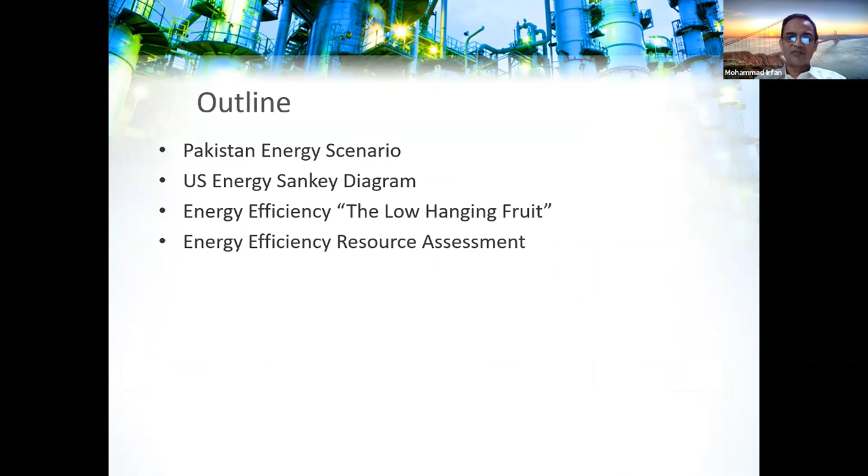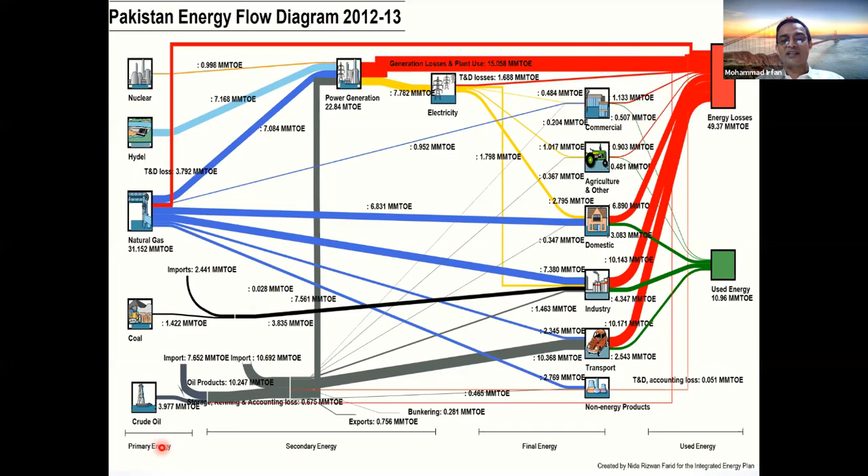Now the concept says that whatever you save, you give it back as a resource. So now energy efficiency, along with your nuclear, hydel, natural gas, coal, and crude oil, you have another resource in Pakistan, which is called energy efficiency. So how do we calculate this resource, right?

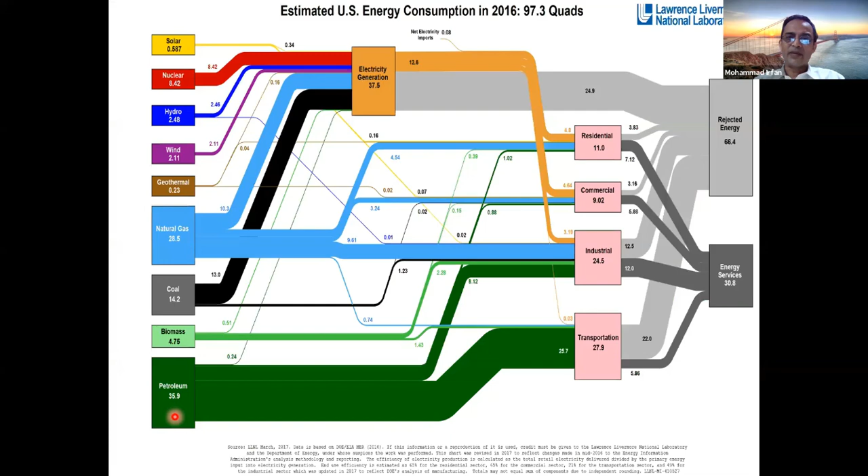Similarly for USA, losses are there, but if you recover, then it becomes a resource, right? So can we reduce wasted energy, right? And we say that waste is not waste until it is wasted. So among all the other resources, if you want to generate electricity, energy efficiency is the cheapest.

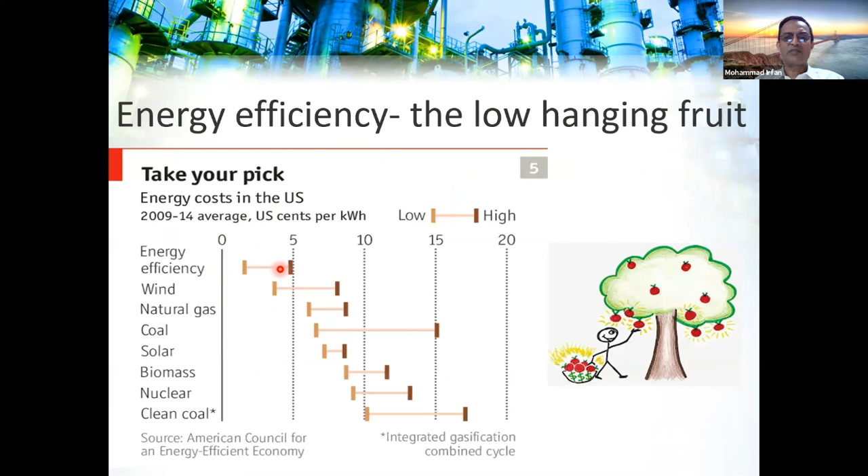It will cost something, right? It will have some cost, for example 0 to 5 cents per kilowatt hour. Others are all more expensive. So it's a low-hanging fruit. Even if you look at the levelized cost of electricity, energy efficiency is the lowest, right?

Solar, yes, it's coming down. Solar every year, every month, it is reducing, right? But the others, nuclear, gas cycle, etc., are not reducing as much. So if you're installing a power plant, we'll say that energy efficiency is the cheapest option.

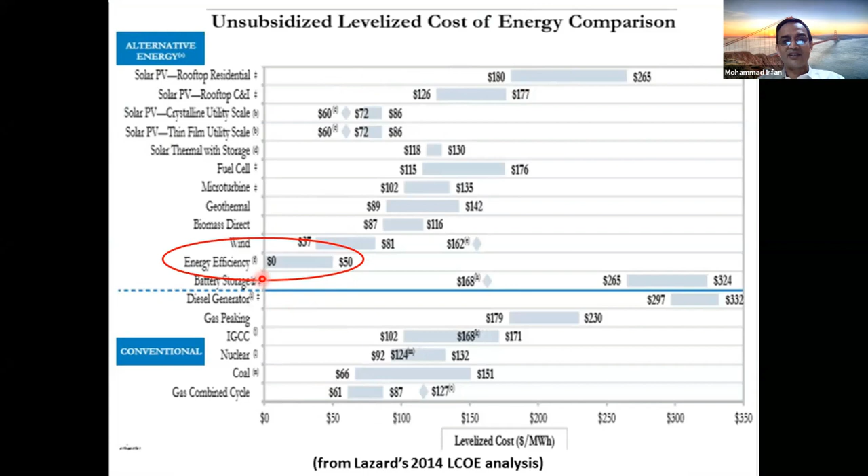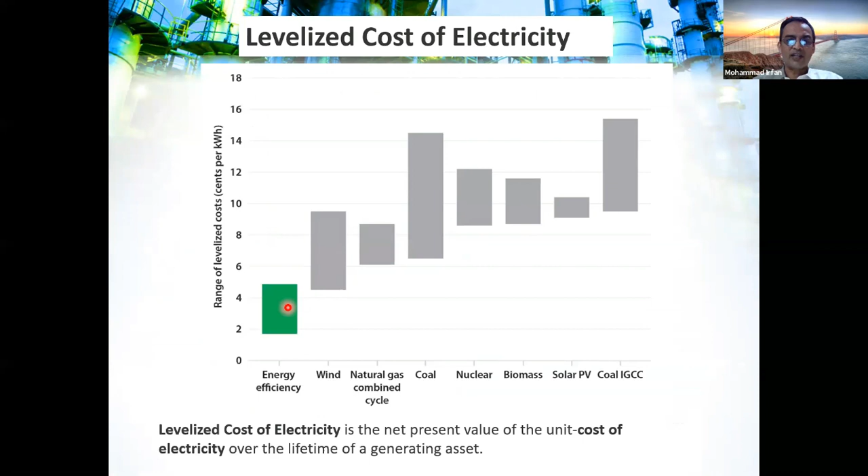And we say that a megawatt saved is a megawatt generated. Same thing about levelized cost of electricity, same graph expressed in a different manner. This is cents per kilowatt hour, again 0 to 5 cents per kilowatt hour.

So we also have this resource in Pakistan, but how to tap it, that is the topic of today's lecture. Now I think you're very clear with the concept that energy efficiency measures, although applied on the demand side, can be counted towards the supply side. So energy efficiency is a resource, right?

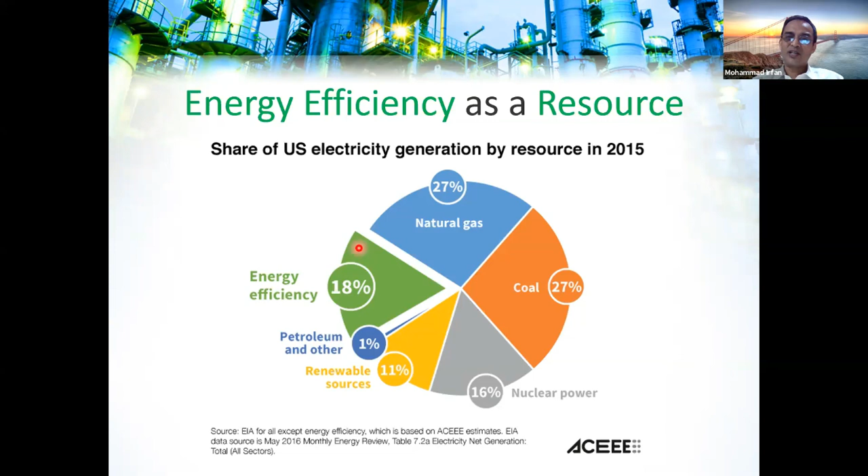And world over, such energy efficiency resource assessment reports are being generated. So for the Oregon state, one of the 50 states of America, they conduct a full study of what amount of resources are available.

Just for example, in KP, you want to survey for oil, right? How much oil is available underneath the ground. You want to survey for natural gas. Similarly, there has to be a survey conducted for how much energy efficiency measures are available. It's available right there where you are sitting, underneath your building. There's, I'll say, a well of oil there.

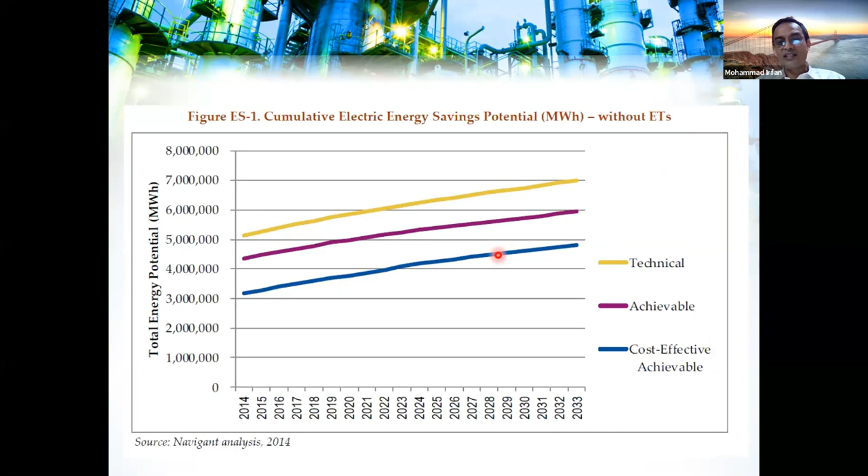So everything that is mathematically possible, sometimes it's not physically possible, but still what all is really possible in your world - there's a huge resource lying there and we have to tap it.

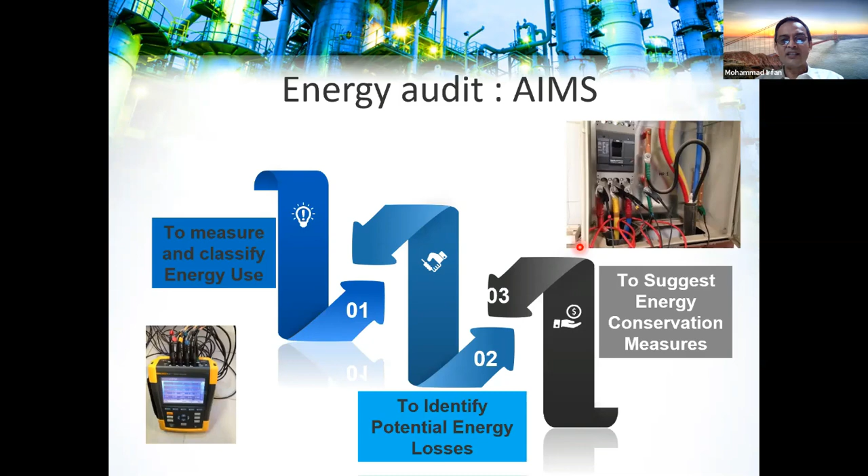So the resource assessment starts with measurement, and mostly these resource assessments will start from energy audits. Once you know how much is there, you can classify how much can be saved. So by these resource assessments, it's benefit to the country - a megawatt saved is a megawatt generated. The total carbon footprint will reduce, and it makes your industries more competitive globally.

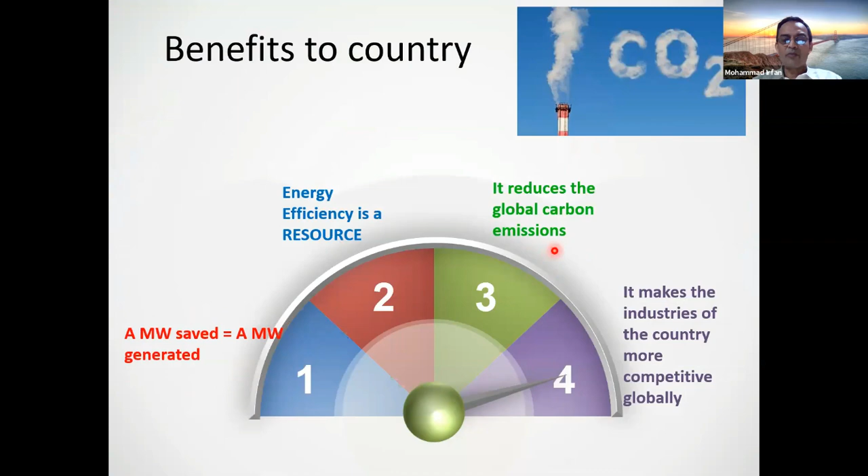So today we start with this message that Pakistan should start its journey on energy efficiency resource assessment. It might be taking the first step, but you will never finish if you don't start. So with this very short introduction, without going into technical detail, because that's followed in the subsequent lectures, you are most welcome to ask general questions. Then we'll go into the detailed resource assessment of the marble sector and textile sector.

So, general questions about resource assessment, you are most welcome.

The energy mix of Pakistan shows that around 37.46% of the energy is consumed by the industrial sector. It means that a large portion, a large chunk of energy, is being consumed by this sector.

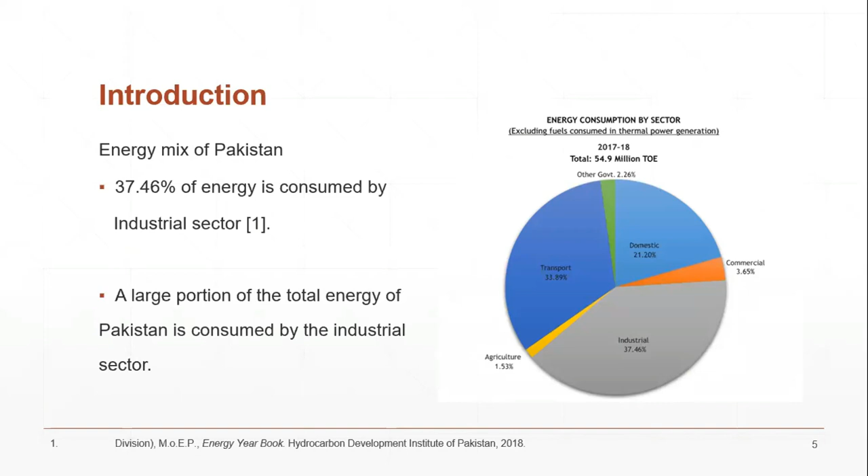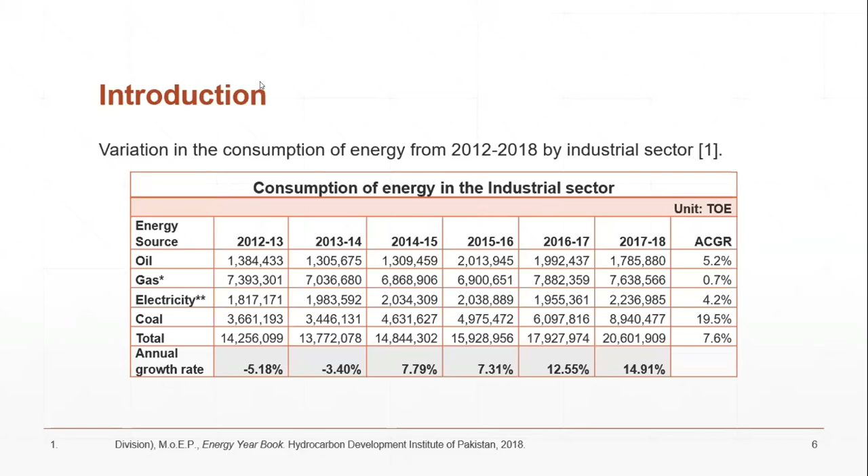So we will continue with the presentation. Let's talk about the literature review. Can you please mute your microphone?

So let us see the energy efficiency resource assessment study of the Oregon State, which was conducted by the ACEEE. Oregon State's different sectors were studied for their energy usage, to see where energy is being used efficiently and where the energy use is inefficient. As a result of that study, some energy conservation measures were suggested.

These measures were suggested in the agriculture sector, the food sector, wood and production, etc. And for each sector, the energy efficiency potential was quantified for the next 10 years. As a result of that, a potential was calculated: 306 megawatts of electricity can be saved by implementing the energy conservation measures.

So this 306 megawatts of energy saved is basically an energy resource which we can utilize elsewhere. So we will carry this concept forward.

Now we study the importance of energy efficiency in the marble sector. First of all, a study was conducted by the State Bank of Pakistan on the marble sector, which reported that the exports from July to September 2012 were US dollars 12.5 millions, and these exports increased quite a lot from July to September 2014. It means that the marble industrial sector has a huge growth potential.

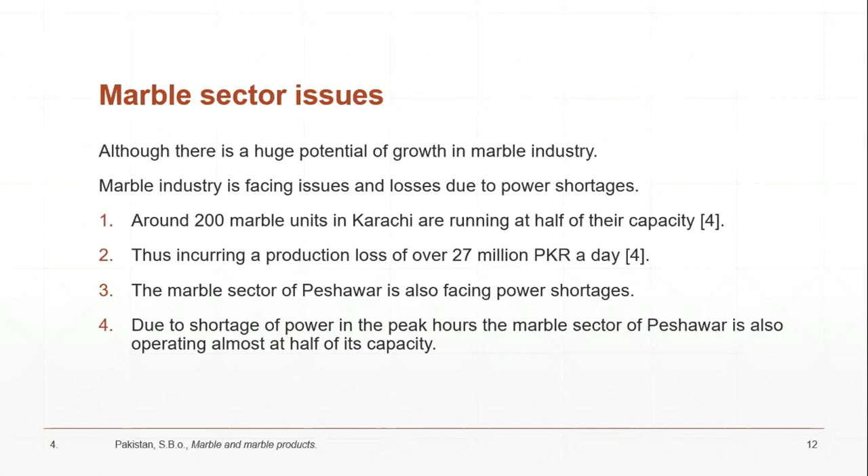So the major two problems quantified here are: number one, a very inefficient use of energy is exercised in the marble industrial sector of Peshawar. Number two, there is a lack of energy efficiency study and measures in the marble industrial sector.

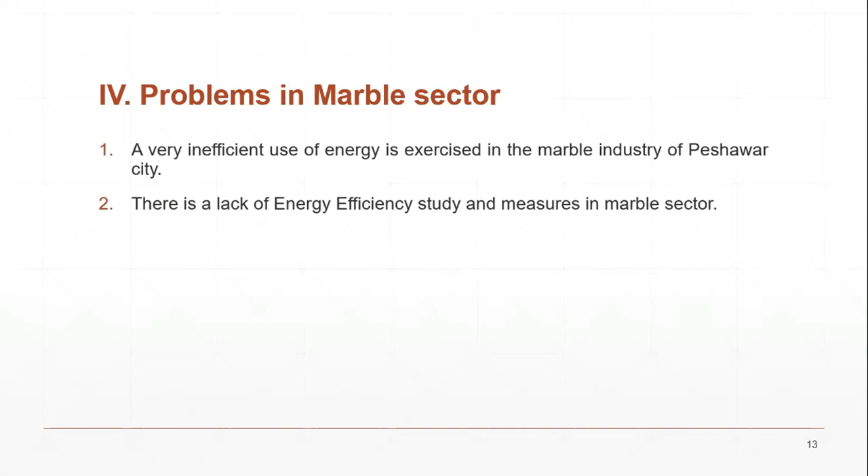So we conducted a study for the marble industrial sector of Peshawar, which basically includes 315 marble units.

The second step was a detailed energy audit of ASHRAE level 1 and ASHRAE level 2. Then some samples were taken from the entire industrial sector and an energy audit of those samples was conducted.

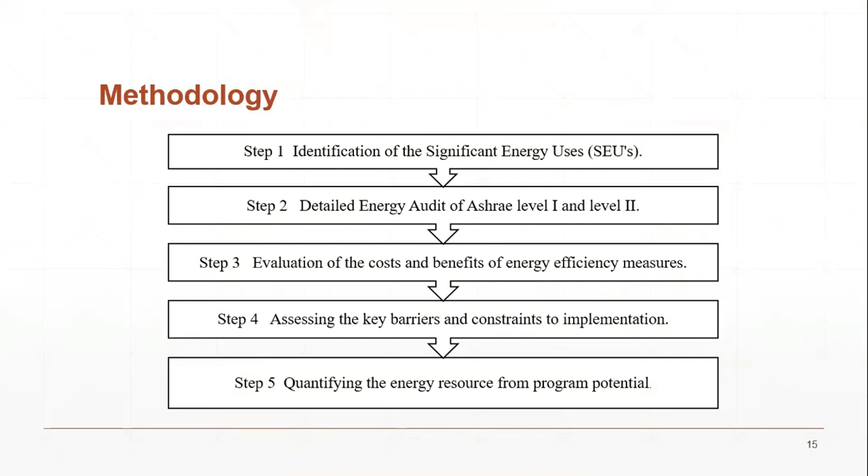The third step was to evaluate the cost and benefit of energy efficiency measures. As a result of the detailed energy audit, some energy conservation measures were suggested, and each energy conservation measure's cost and benefit analysis was done in terms of economic parameters.

In the fourth step... can you hear me, sir?

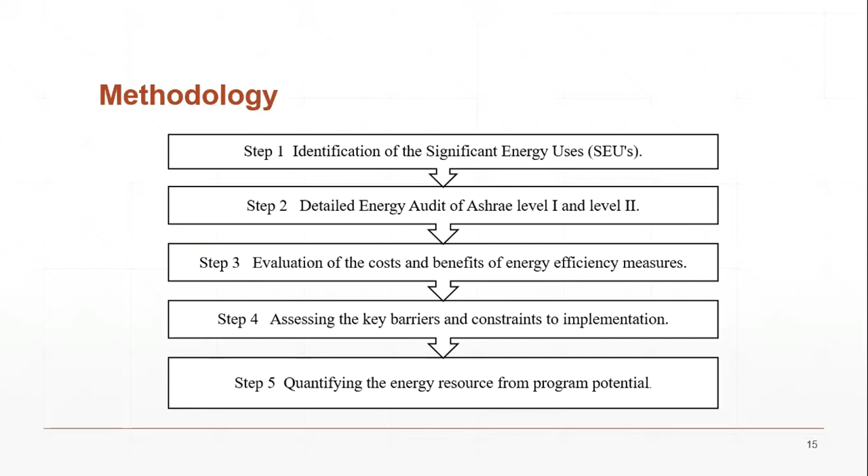We will move towards the energy audits. We conducted the energy audits of sample industries. A few energy audits are presented here - the energy audit of marble industry number 1.

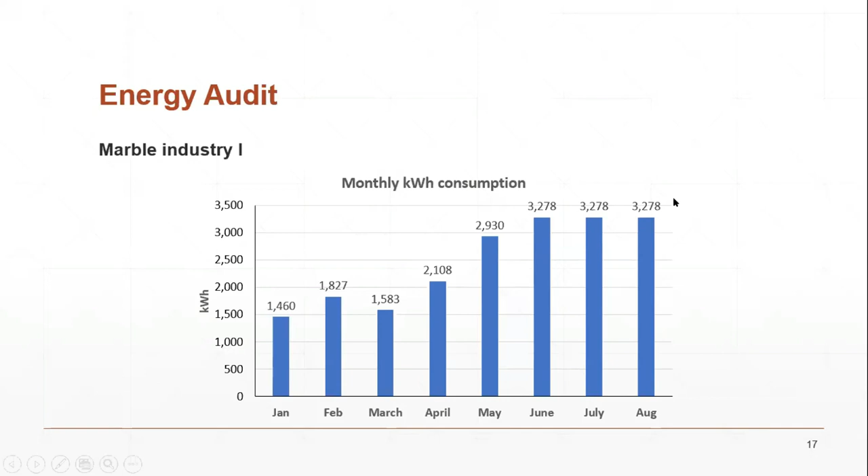Then we studied the electricity bills of the industry. After studying the bills, we identified that the industry is being charged for a low power factor penalty, because the industry is being operated below the power factor of 0.85. The industry wasn't even aware that they were being charged this penalty. So the first step was identifying the low power factor penalty from the electricity bills.

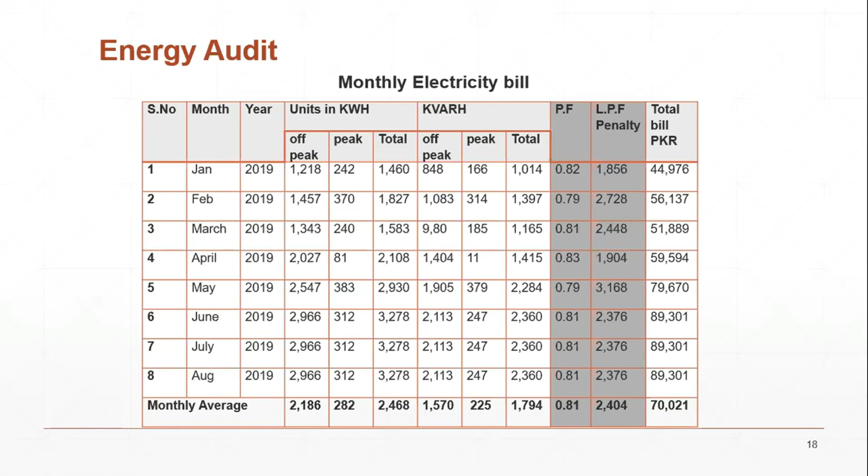The current practice in the industry was that the average power factor of the facility was 0.81. The impact of this practice was that the facility was being charged a penalty of 28,848 Pakistani rupees per year for this low power factor.

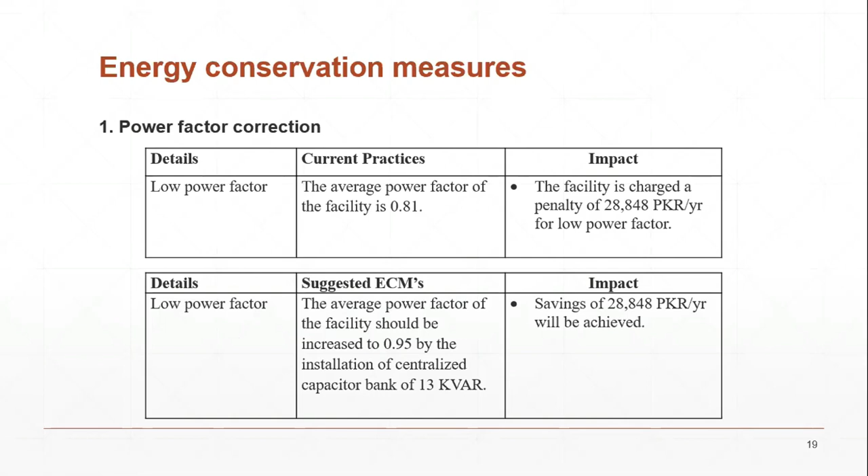So we recommended that the power factor of the industry should be increased to 0.95 by the installation of centralized capacitor banks, calculated to be 13 kVAR. The impact of this energy conservation measure would be that the industry will save 28,848 PKR per year by implementing this measure in the energy bills.

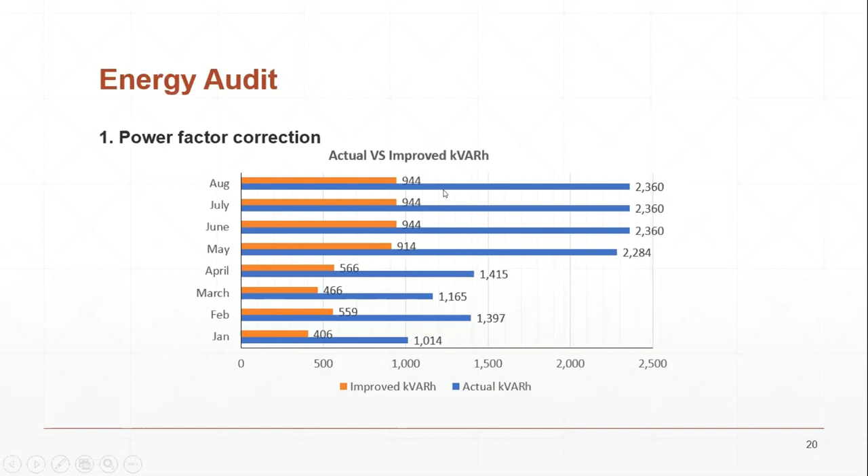So for this energy conservation measure, we calculated the economic terms. If we increase the power factor, we would save a total of 28,848 rupees. This investment will be of 25,000 rupees, and it will pay back in 10 months. The benefit to cost ratio for this investment comes out to be 9, and the internal rate of return was calculated to be 82%.

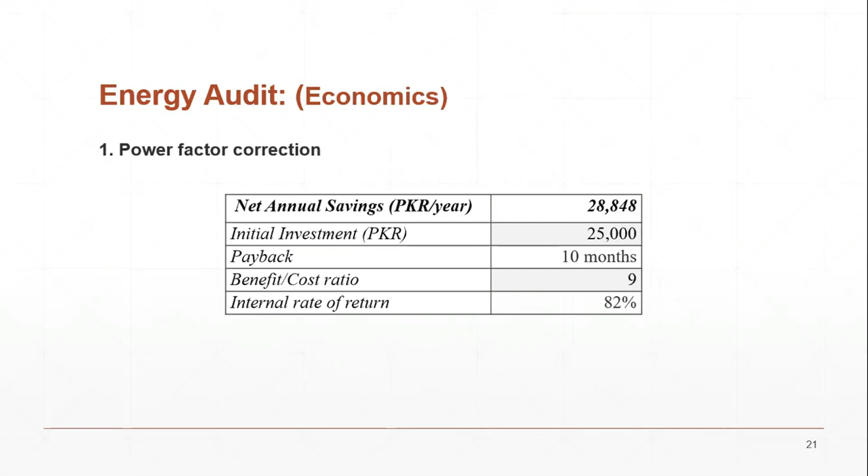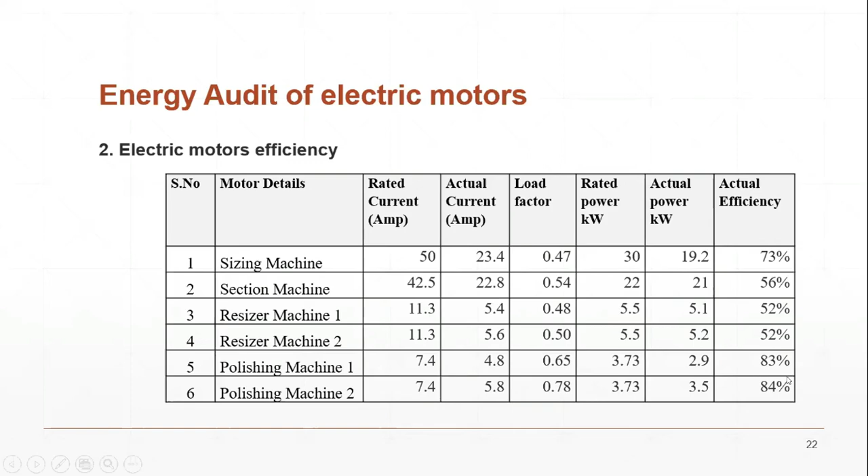The current practice in the industry was that it was operated by motors of 52 to 84% efficiency. As a result of these low efficient motors, the energy consumption of the industry was increased.

We recommended that some of the motors which are operating below 70% efficiency should be replaced with 95% premium class efficient motors. This energy conservation measure would impact a saving of 12,156 kilowatt hours per year.

Hello, sorry, can I ask a question, please, about the economics? My name is Muhammad Ali. Can you please tell me how did you calculate the efficiency of motors?

Can you hear me? I think Engineer Zaim will respond. If you can go to the previous slide, Engineer Zaim. So they are asking how did you calculate the electrical motor efficiency. You can tell about the power quality analyzer, etc. You can share the process with them. Over.

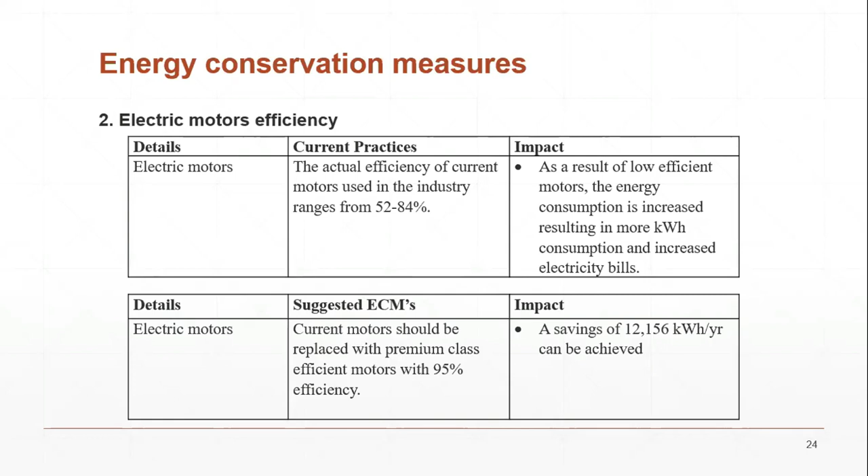The different economic parameters calculated for this energy conservation measure are: if we invest in German Siemens motors, replacing the current motors with German Siemens, the initial investment will be around 1.5 million rupees. It will pay back in 9.2 years. The benefit to cost ratio will be 0.85, and the internal rate of return is around 1%.

But if we invest in Chinese Siemens, the initial investment is around half compared to the German Siemens. It will pay back itself in 4.6 years, and the benefit to cost ratio is 1.7. The internal rate of return comes out to be 17%. Although 4.6 years is a long payback period, the life of motors generally ranges around 10 years, so we can still invest in this energy conservation measure.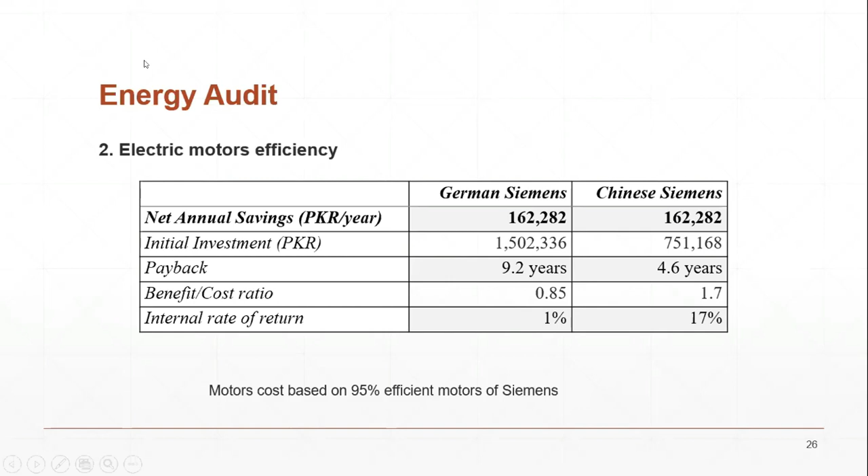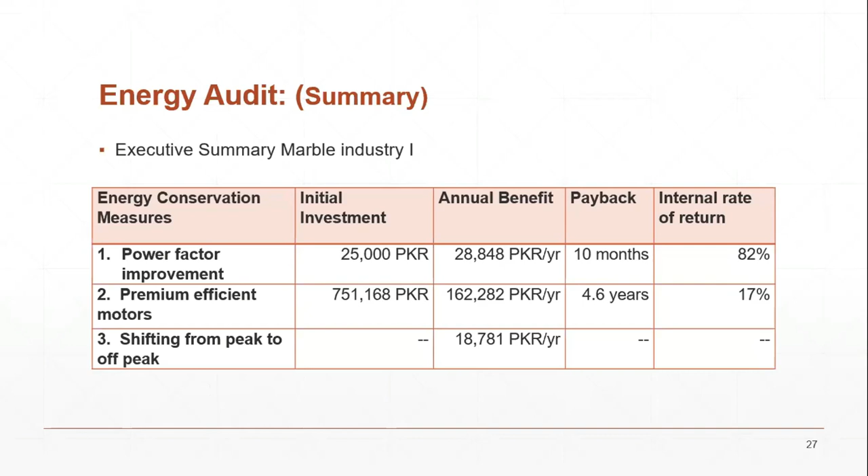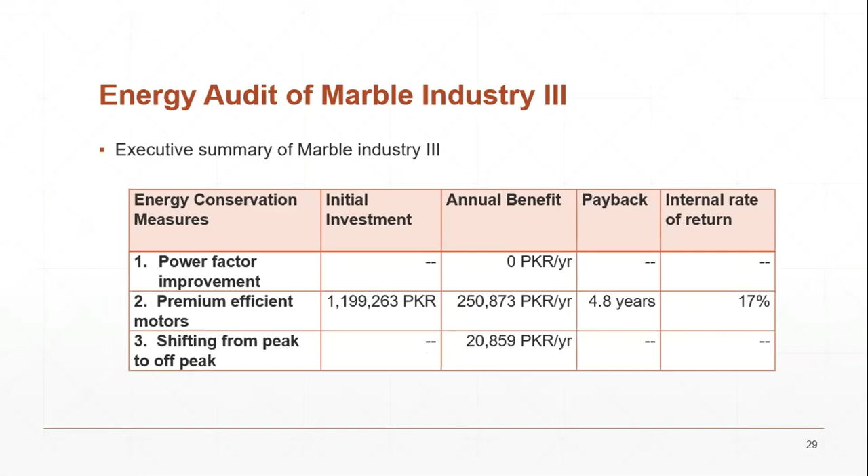Now we will study the energy efficiency resource assessment for this sector. The program potential identified for energy savings in the marble sector of Peshawar consists of: number one, power factor correction; number two, use of premium efficient motors; number three, shifting from peak to off-peak hours.

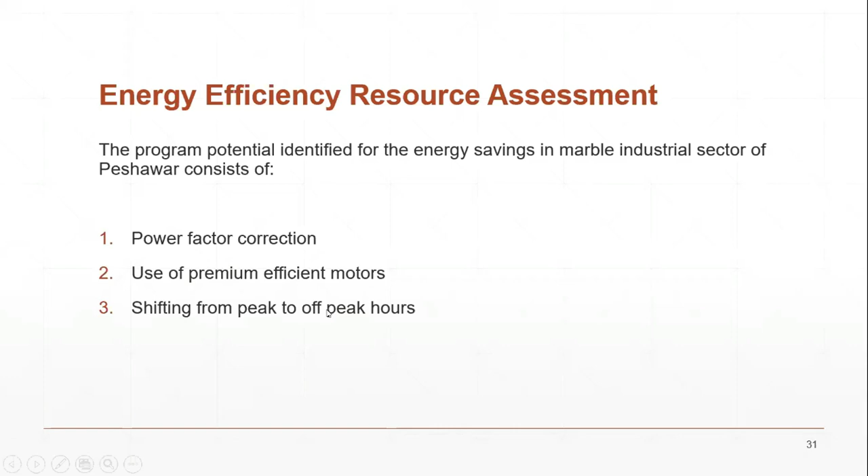Average savings of the industry are calculated on the base of 18 samples. We have just listed 3 industries, but it is actually calculated for 18 industries. The savings in kilowatt hour per month for a single industry will be 1346 kilowatt hours per month, around 16,000 kilowatt hours per year, and the industry can save up to 215,000 PKR per year.

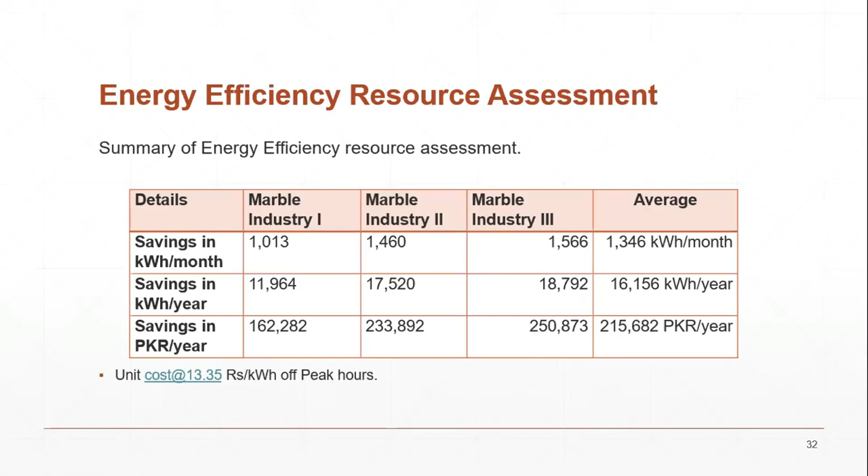If we extrapolate these results for 315 marble units of Peshawar, the estimated consumption of these 315 marble units per year is around 12 million kilowatt hours. And if we implement the different energy efficiency measures presented before in my slides, we can save around 5 million kilowatt hours of electricity per year, which is a huge figure.

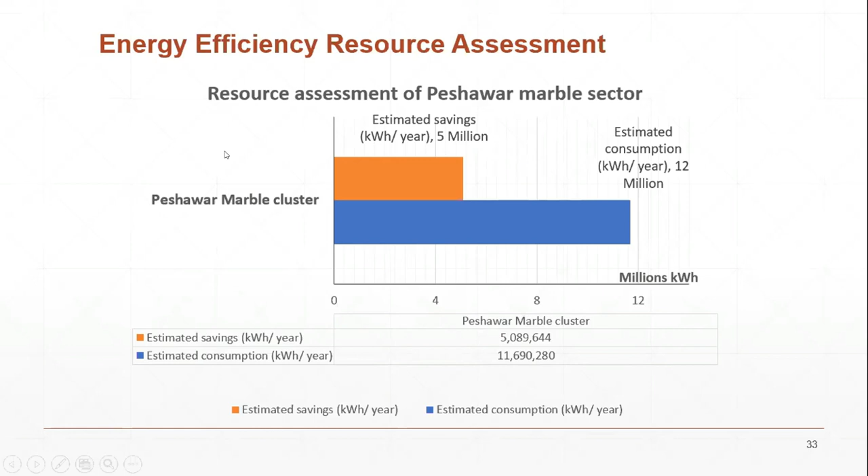If we compare these ECMs in terms of rupees, the estimated bills the whole industrial cluster of 315 units pays to PESCO, the Peshawar Electric Supply Company, is around 156 million rupees. If we replace the low efficient motors with highly efficient motors, we can save up to 67 million rupees for this industrial sector.

If we correct the power factor, we can save around 6.74 million Pakistani rupees per year. And if we shift the working hours from peak to off-peak, we would save an estimated 7.27 million Pakistani rupees per year.

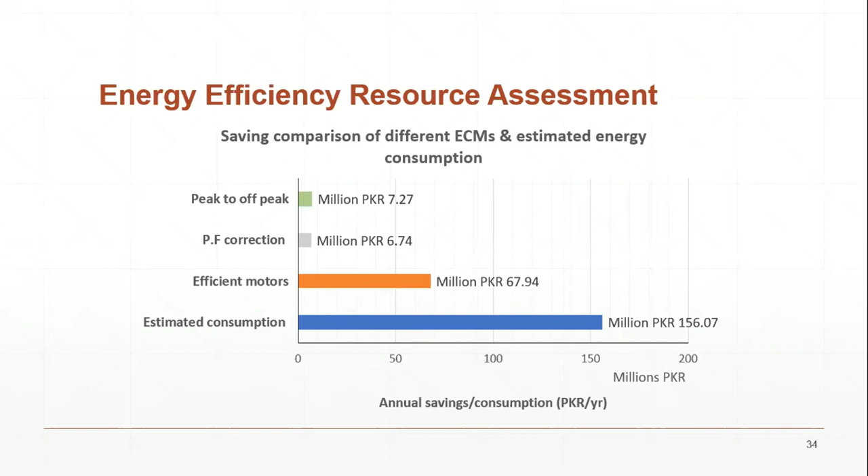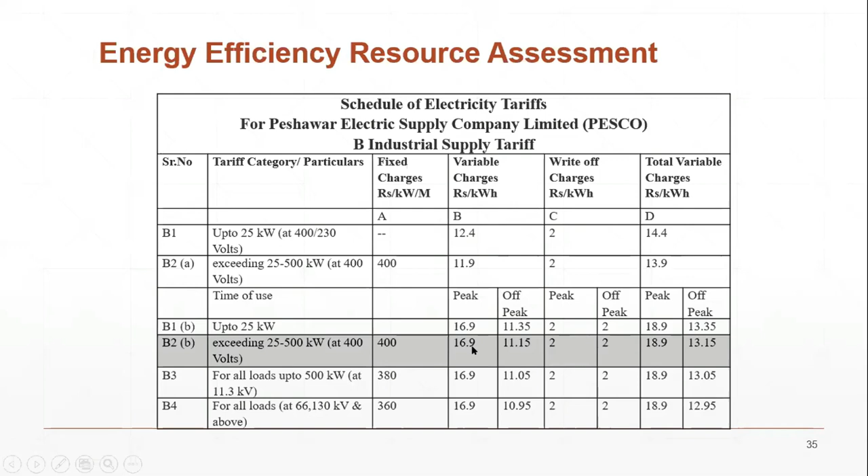The conclusion of this whole study is that with power factor correction, we can save 6.7 million rupees with an initial investment of 5.25 million rupees. The payback for this investment for the whole industrial cluster of Peshawar will be 0.8 years.

For the second ECM, we can save around 67 million rupees with an initial investment of 283.6 million PKR, and this investment will pay back in 4.2 years. For the third ECM, we can save around 7.2 million rupees, and this ECM will not cost any penny to the industry.

From the overall program, we could save around 81.94 million Pakistani rupees for a period of 10 years, with a one-time initial investment of 288 million Pakistani rupees. The whole investment in the three ECMs will pay back in 3.5 years.

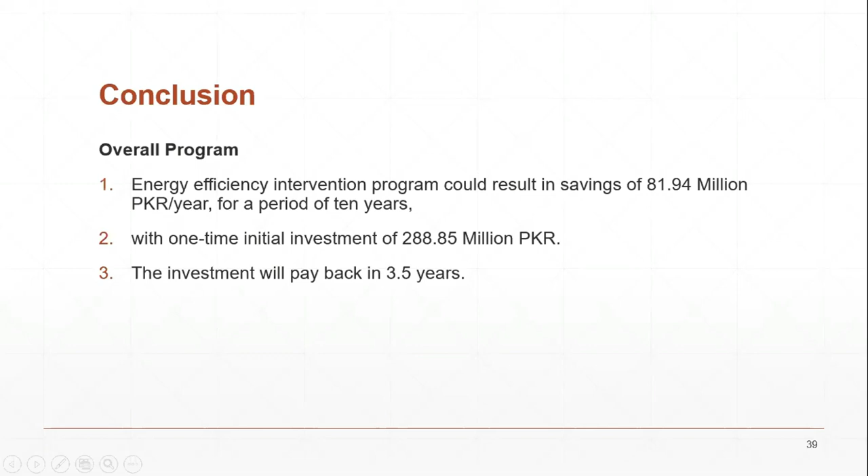For recommendations and future work, there are worldwide government interventions to implement energy efficiency programs. In Pakistan, NEECA, the National Energy Efficiency and Conservation Authority, should play its role in implementing programs like these. A study on energy efficiency resource assessment for the marble sector across the whole of Pakistan could help present the bigger picture of energy savings.

Thank you from my side. If you have any questions, you can ask.

Assalamu alaikum, Fahad Salim.

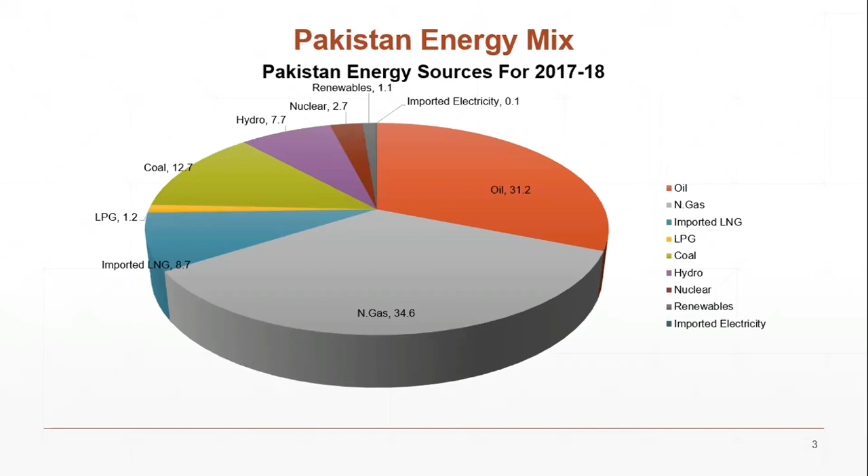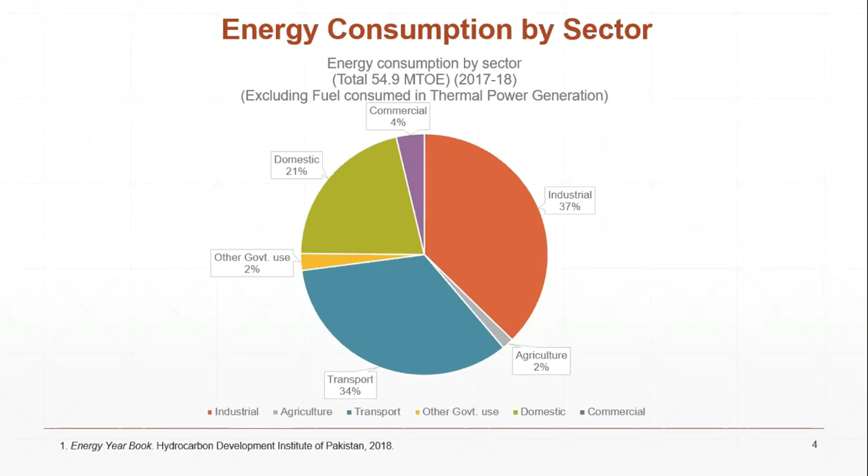This slide, which Zaim also shared, shows that the most consuming part of the energy consumption sector is industrial, followed by transport. According to the Hydrocarbon Development Institute of Pakistan, as per the Energy Year Book, 37% of energy as of 2017-2018 has been used by the industrial sector. So it is very important to cope with this challenge and consider it.

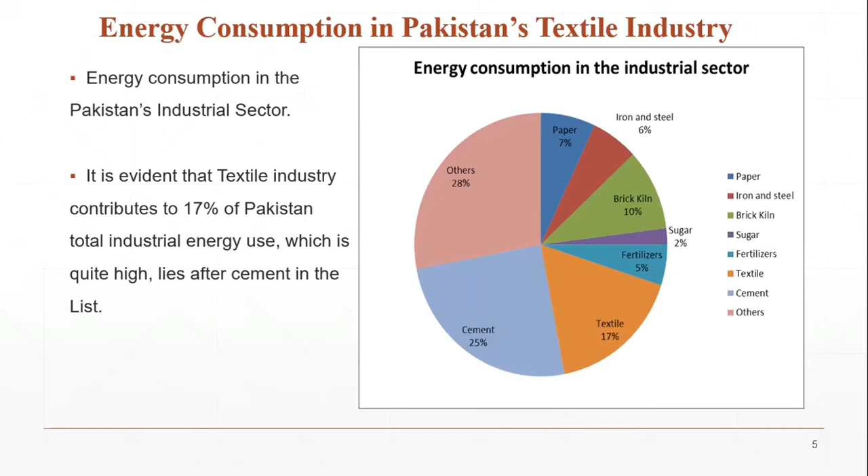If we see the graph, the major energy consuming industry in Pakistan is the cement industry, followed by textile, which is 17%. This means the textile industry is consuming 17% of the energy of the whole energy mix of the industrial sector, which is a major part of the energy mix of Pakistan.

If we look at the Pakistan textile industry, it is the most important industry within Pakistan, ranking 8th in Asia on the list of textile commodity exporters. Textile in Pakistan contributes 8.5% to the GDP of Pakistan, and its total export is about 50% of Pakistan's exports. It provides employment to 45% of the total labor force, and Pakistan is the 4th largest producer of cotton, as Pakistan is an agricultural country.

These figures show how important the textile industry is in Pakistan, as it is one of the main industries that has an independent textile organization and textile ministry running it. There is no other industry that has an independent ministry; textile is one of them.

If we look at electricity and thermal consumption within the textile industry, the textile industry is categorized into different categories: spinning, weaving, composite mills, finishing, and stitching. Each has different SEUs, significant energy uses. Considering spinning, the main significant energy use is electrical energy. If we consider finishing or weaving, the thermal energy use is the significant energy use.

There is some literature review from all over the world and within Pakistan that we have studied for this research. Energy cost is next to raw material cost, about 15 to 20% more than production cost. We may think the major cost is raw material, labor, and other costs, but the major cost after material cost is the energy cost. This should be considered - if we reduce the energy cost, our production cost will be minimized, and we can compete more effectively worldwide.

In literature, it has been found that specific electrical use and specific energy use, also known as key performance indicator, is 0.17 kilowatt hour per piece and 0.78 megajoule per piece for electrical and thermal energy use. That is the key performance indicator for the textile industry worldwide.

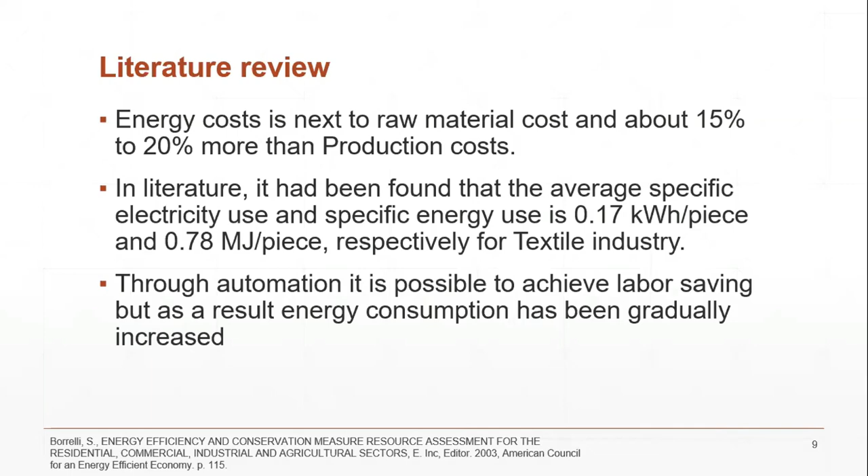Through automation, we see in most studies that we can save cost, but labor cost can be saved while energy cost will be maximized in this sector.

Final energy use in the US textile manufacturing industry is 39% electricity and 61% fuel, according to our literature study. The textile industry is the 5th major consumer of steam within the world.

The final consumption of textile energy has been recorded to double from 47 exajoules per year to 90 exajoules within a span of about 30 to 35 years. We have jumped about double in energy consumption in the textile industry as the population of the world is increasing and the textile demand is increasing, so we have seen that energy consumption is also increasing in this sector.

Now we will study the methodology, how we conduct our research and how we conduct the study. There are 5 steps we are considering in this research, the first being a survey of energy audits.

We have energy audits of 18 industries within the Pakistan scenario, ranging from Balochistan to Punjab and some other sectors. The other part is a summary of significant ECMs. The third part is regarding the classification of the resulting energy conservation measures as economical, technical, and marketable.

As you have also seen this part in the slides of Dr. Irfan Saab, I will explain it further in my coming slides, inshallah. The fourth part is the energy efficiency resource assessment, and identification of energy saved and returned to the national grid.

Energy audit is the first step towards energy efficiency resource assessment. If we cannot measure, we cannot assess this energy efficiency, how to calculate this. Energy audits range from walkthrough audits to the energy audit reporting. The first step is the walkthrough audit, then the detailed audit, and lastly we have a detailed energy audit report comprising significant energy uses, key performance indicators, and all these listings.

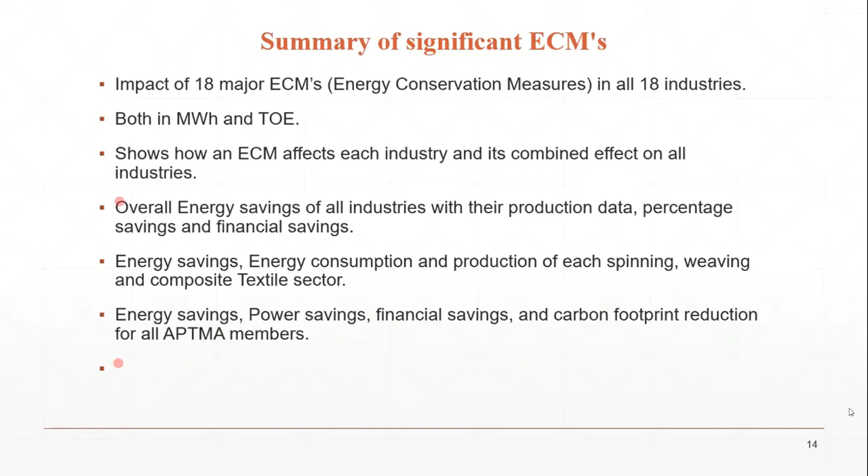The third part is about the classification of ECMs as technical, economical, and marketable. Basically, our research is based on the Navigant report on Energy Efficiency Resource Assessment for Oregon state, on how they implement their energy saving measures in different sectors, buildings, and industries.

Here we will identify the potential energy conservation measures in textile industries. From about 200 scrutinized energy conservation measures, we narrowed it down to about 10 measures on which we will apply economical, technical, and marketable filters based on the Navigant report. Several ECMs were found to have limited applicability in the Pakistan scenario, so we filtered those out.

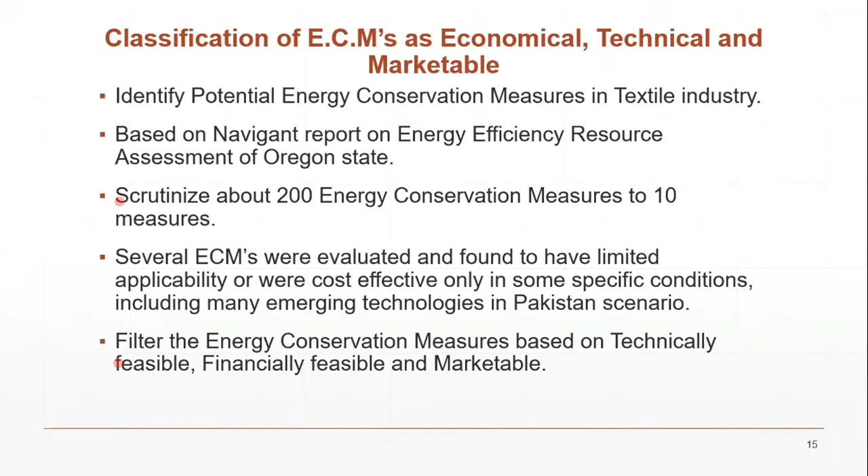The filter will be applied on these 10 ECMs, that is how it will be economically viable, how it will be technically viable, and how it will be marketable in Pakistan's scenario. If we consider the ECMs as economical, technical, and marketable, and if we are filtering these, the first filter we are applying is technically feasible.

Technically feasible means that if we consider an ECM, we will see how it is technically feasible. Most of the time we see that an ECM is technically feasible in the energy efficiency scenario, but in the energy production scenario it is not technically feasible, so we will filter it out.

So that's the first filter. We also see what are its benefits, what are its costs, and how it affects the overall company. In the next slides, we will take these into detail.

Marketable means how it is achievable, how it is available in the Pakistan scenario market - whether it is available or viable in Pakistan or not. And economically feasible means we see whether it is economically viable, financially viable, to consider this ECM in our industry or not.

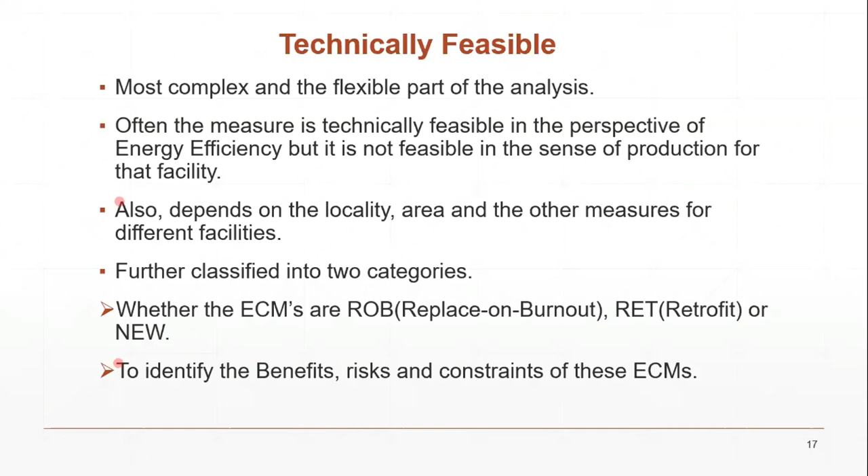The second filter we are applying in this filtering is marketable. According to the Northwest Power and Conservation Council, USA, 85% of technically analyzed ECMs are achievable. If we consider 100 ECMs, 85 of them are considered marketable. This is the short way to consider an ECM as marketable.

However, the analysis can be based on three criteria. First, surveying different textile industries to assure the applicability of the ECM in the local market - we survey different textile industries in the industrial sector, manually asking them whether implementing this ECM would be beneficial to them or not.

The second is demand-need analysis of the industry for the given ECM. This means whether industries are in need of this ECM or not - how is their demand, how is their need according to this ECM.

The third is keyword selection search through search engine optimization. For example, if our ECM is about energy efficient motors, then in Pakistan's scenario we will search through keyword selection how many people from the industrial sector search for it on different search engines like Bing, Google, and Amazon. Through this, we can also apply this marketing filter.

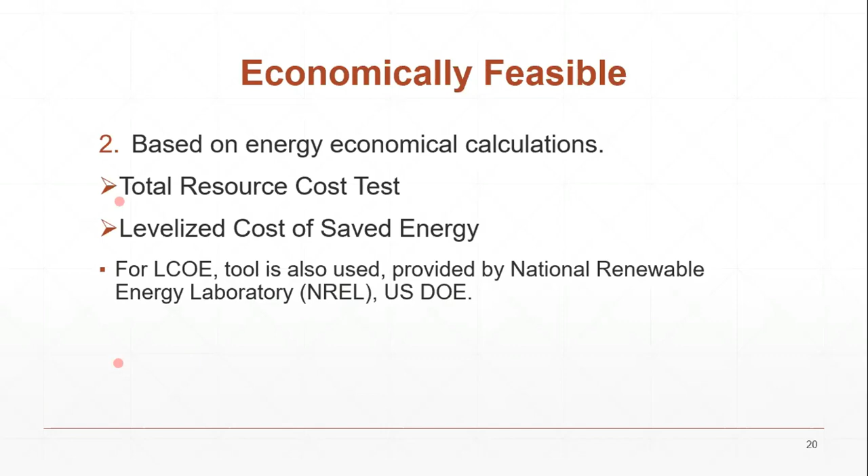What is the total resource cost? It means you have measured the net cost of a demand side management program as a resource option based on the total cost of the program, including both participant and utility cost.

Basically this test is about how, if you apply an ECM, it is beneficial to you, and how much cost is required to implement it. This is one of the important energy economic calculations while we have considered alternating fuels and implementing energy efficiency calculation. This is one of the most important measures we have applied.

For calculation and evaluation of total resource cost there are two methods we are applying. There is also a third method, but we have shown the two methods here: the NPV method (net present value method) and the benefit to cost ratio method, BCR.

In the NPV method, there is a formula, but I will jump to the next section: when NPV is greater than 0, the program is beneficial, meaning the benefit is greater than cost. On the left side, BTRC is benefit total resource cost minus cost total resource cost test. If the benefit is greater than cost, then NPV is greater than 0 and the program is beneficial, and vice versa it is not beneficial.

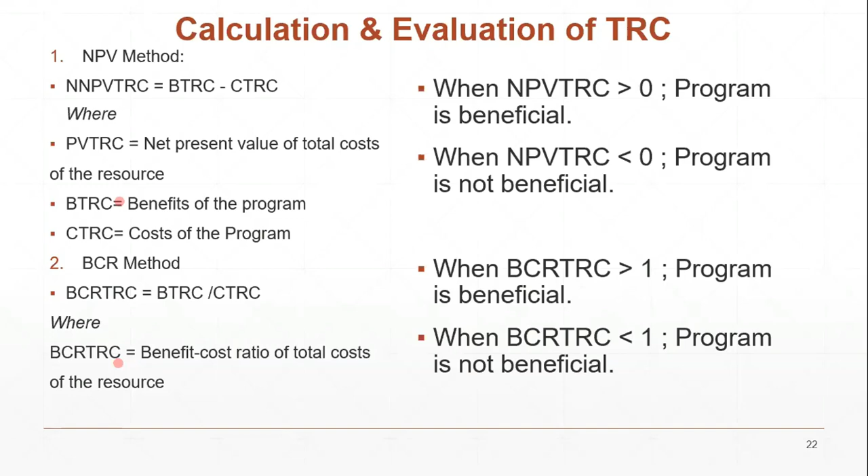The second category in the energy economic calculation is the levelized cost of energy. We have seen that some people say solar is the best energy, or that we should build more and more dams. But to consider which energy is most efficient and cost effective, we should take into consideration this levelized cost of energy.

It considers the measured lifetime cost divided by energy production - the costs applied including construction cost, operation and maintenance cost - and how it gives the output of energy to us. On the left side, initial cost and annual expenses equal $125, and it produces 1,000 kilowatt hours, resulting in 0.125 per kilowatt hour.

This means that by applying these measures, for 1 kilowatt hour we have considered 0.125 dollars, equal to 1 kilowatt hour equal to 12.5 cents.

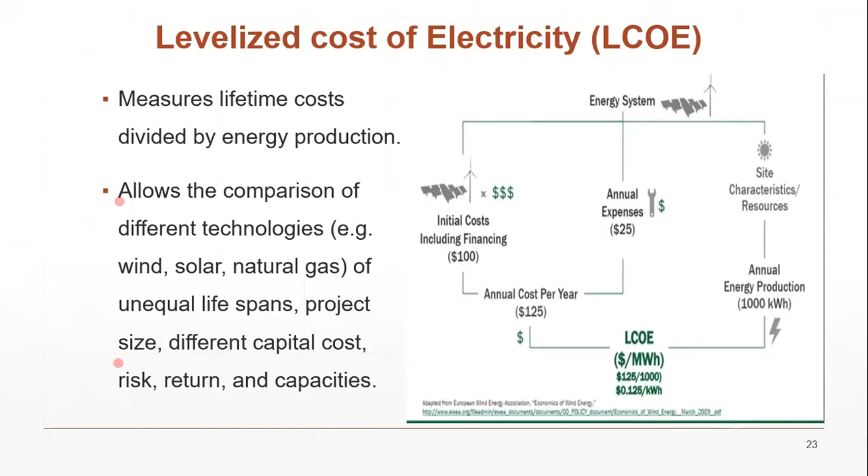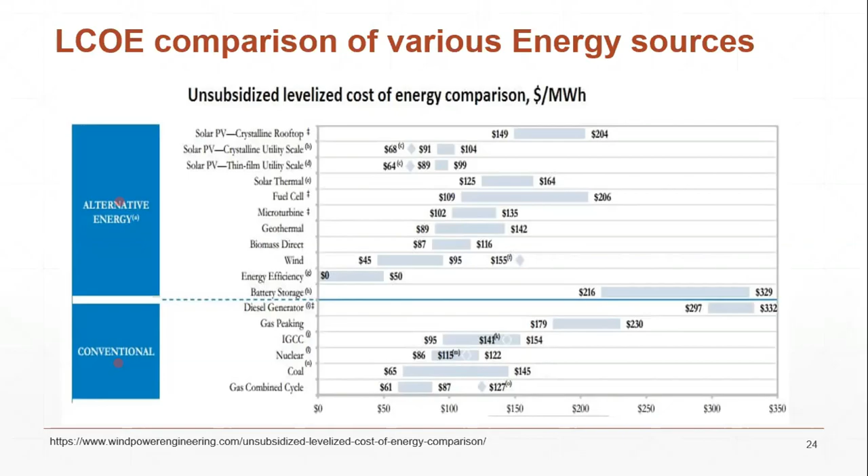Impact of energy efficiency in the textile sector of Pakistan - this is the third part of our research.

As I told earlier, we have 14 energy conservation measures implemented across 12 of our factories. These factories we have audited in the Pakistan scenario, with 14 energy conservation measures.

This is their effect on each industry - how power distribution system line loss is considered. For the line losses reduction ECM, power distribution system ECM, in the first industry we will have 551 megawatt hour per year saving of energy, and we have a combined effect of 12,379 megawatt hour.

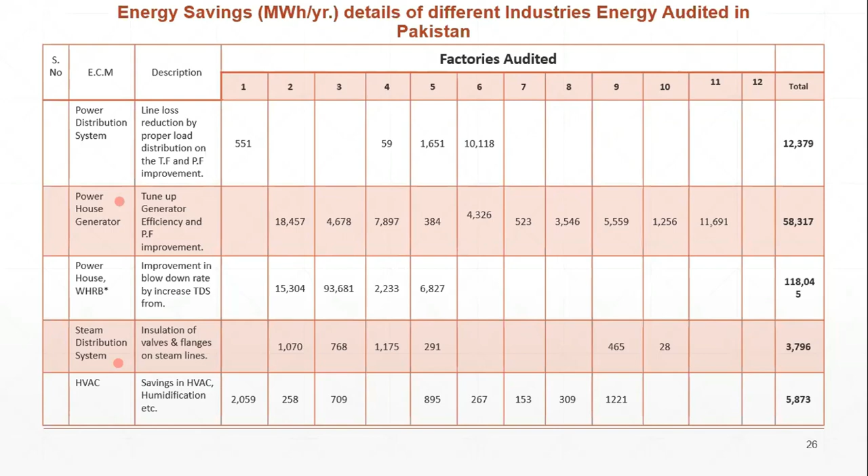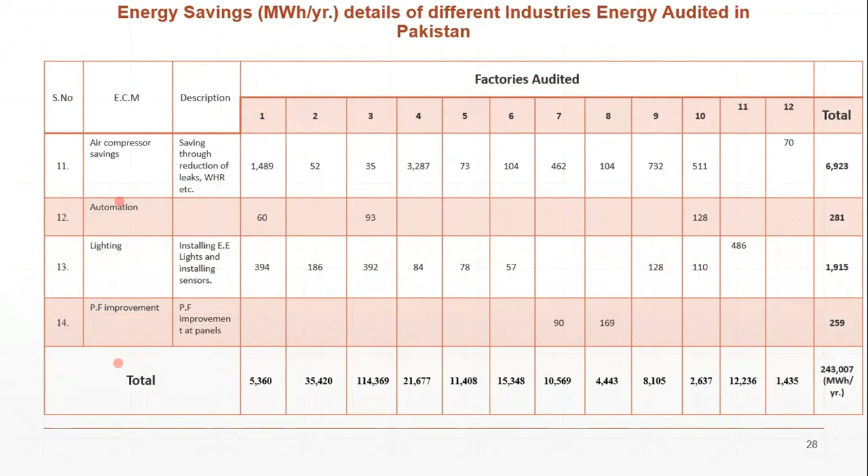We can see all of these 14 ECMs, how each affects each industry and how they combinedly affect all industries. So this is the general overview.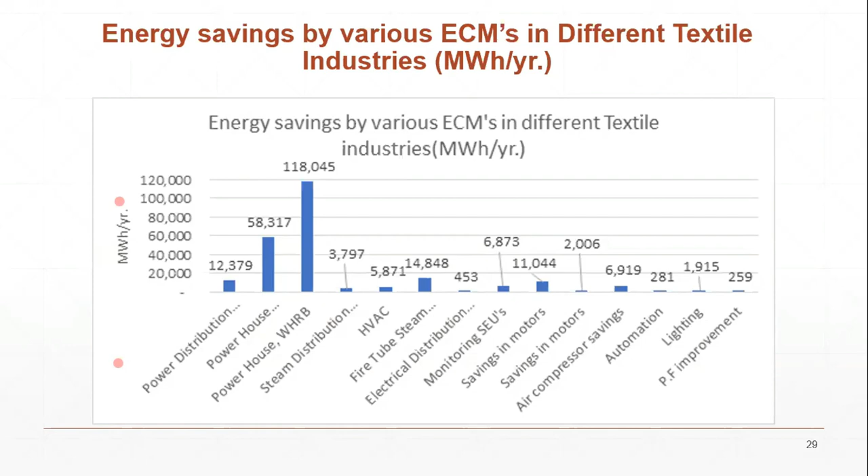As I have told prior, there were 200 measures from international studies, and within Pakistan nationwide studies and our energy audited industry studies, we have within 200 industries scrutinized 10 of the ECMs, applying filters on this. As technically viable, we skipped two filters, and we are relying here on financial viability.

We can see the levelized cost of a measure, and we can see that installing a variable frequency drive machine is $0.05 per kilowatt hour, meaning 5 cents per kilowatt hour. It means that...

Please can you mute your mic?

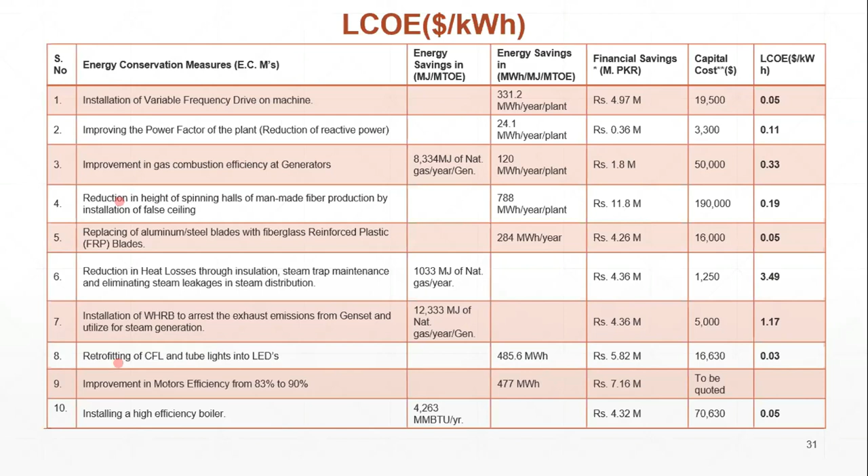Okay, it means that if we install the VFD on a machine, then each kilowatt hour is about 5 cents we will produce by implementing these schemes. This is the general overview, and we can see the energy savings from this ECM, energy saving, financial savings, capital cost on that ECM, and the levelized cost.

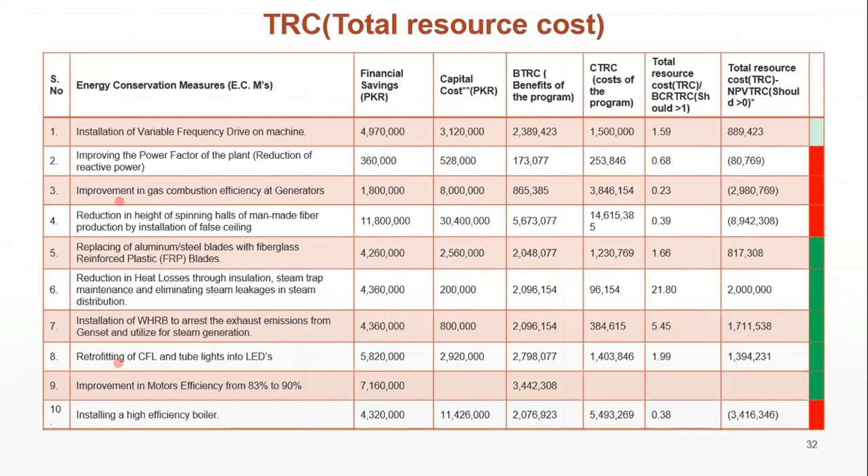Okay, total resource cost. If we see the total resource cost, then we see the last three columns, the total resource cost according to the benefit cost ratio and according to the net present value. We see that the first, fifth, sixth, seventh, eighth, and ninth ECMs are viable, because in the NPV scenario it is greater than 0, and in benefit cost ratio it is greater than 1. So as I have told earlier, if the total resource cost ratio is greater than 1, we will consider it viable and we should implement it.

Okay, there are some measures from industries we have audited in Pakistan: energy consumption, energy saving, percentage savings. There are some spinning mills, weaving mills, and finishing mills. We have considered energy consumption in the third column, we have seen the energy consumption of that industry. After that, we can see the energy savings and percentage savings, seeing how much the industries can save if they implement the ECMs in their facilities.

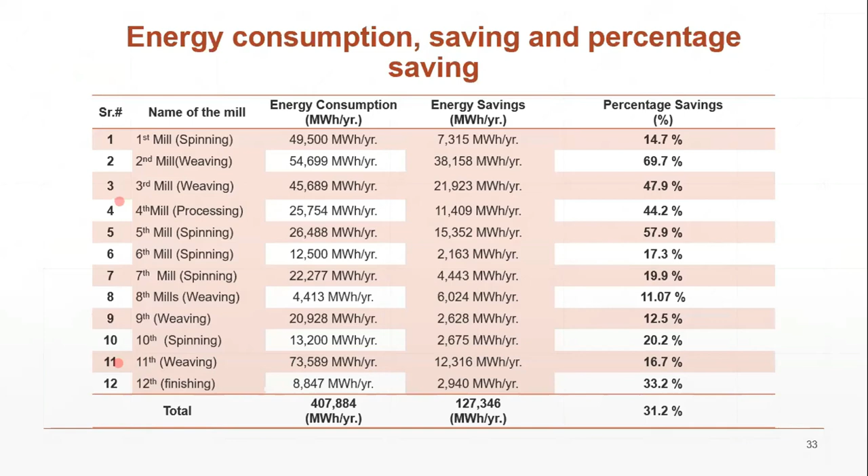Okay, this is the energy consumption for all. This is the Sankey diagram from the energy conservation measures we have applied, energy supplied to the energy savings. From the leftmost, we see that energy supplied is 407,884 megawatt hours. This energy is supplied to these 12 industries and distributed among them. The green line shows the energy they are using efficiently, and this chunk is the energy they are losing across all industries. After analysis of all this, we see that 31.2% of energy, meaning one-third of energy, is being lost in textile industries of Pakistan.

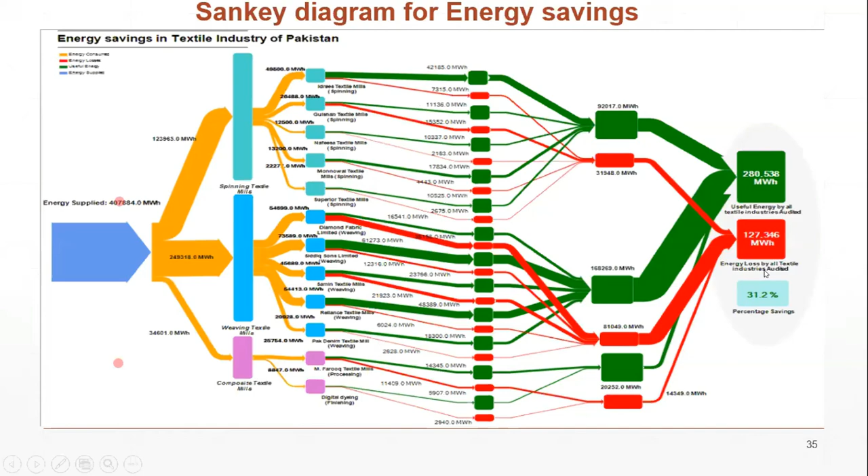So there is energy consumption, there are energy savings, and these are the key performance indicators showing how they use electricity. In my last lecture I said what the key performance indicators are, how they use gas or energy with respect to their production. We can see how they are using energy, and we can compare this with the overall world.

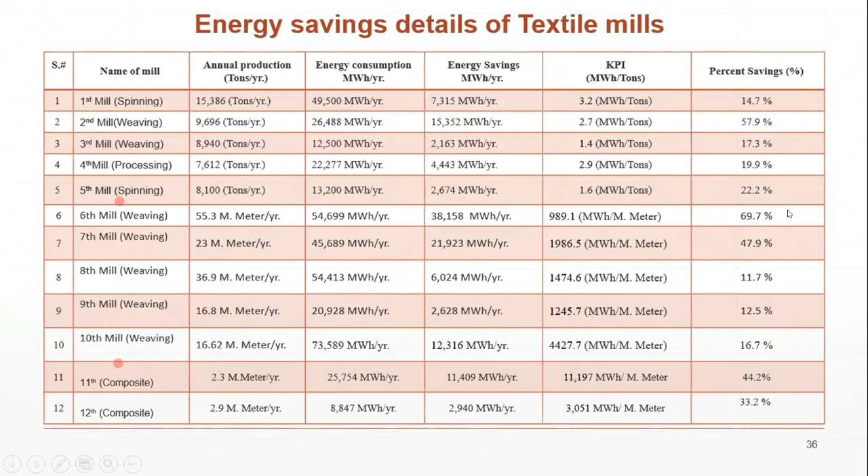Okay, this is the most important section of our results. Here we have extrapolated our results on all APTMA members, All Pakistan Textile Mills Association members only, keeping in consideration that there are many other mills not listed in APTMA. This research is about APTMA members only. From APTMA we have 315 spinning mills, 44 weaving mills, and 37 composite mills, totaling 396 mills.

If APTMA members implement these ECMs, this much saving we will have. Our energy savings for each spinning mill is this much, for weaving this much, and this much for our designated sectors of spinning, weaving, and composite. For total energy saving, we extrapolated results by categorizing textile industries into three categories: small, medium, and large-sized industries based on production.

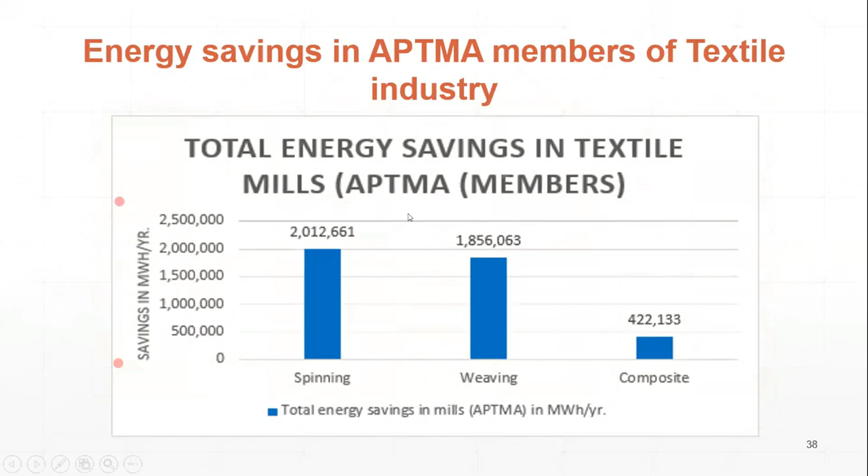In Pakistan's scenario, from the power system statistics of 2018 from NTDC, National Transmission and Dispatch Company studies, it's stated that transmission and distribution losses in Pakistan are 20.6%, with 2.3% transmission losses and 18.3% distribution losses according to 2018 data. If we consider these losses on the generation side, we will have the generation capacity. If we apply the ECMs and add these losses, we will have savings of 683 megawatt year.

If we consider the Sahiwal power plant, its capacity is 1320 megawatt, and construction cost is 180 billion. This means our resource is about one half of this Sahiwal power plant. This means $0.9 billion we can save per year if we implement ECMs in only APTMA member textile industries. This is a huge saving in Pakistan's scenario for our import bills, and it's very beneficial to our indigenous resources as well.